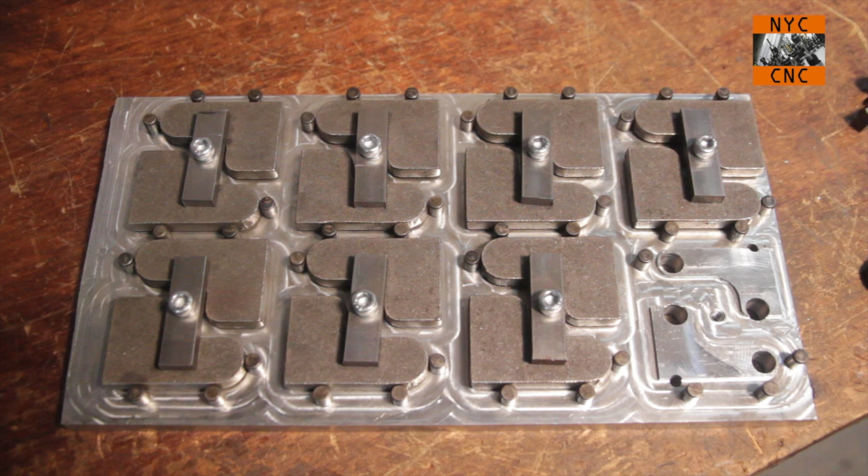So again, I'm no expert on this, but I've made a number of these now, and I've figured out some things I like and things I don't like. Some may be obvious, some may not, so let's dig in. The primary operations done are drilling, which makes the fixture a little bit easier to design because you don't have a lot of lateral forces.

So the first thing is, anytime you can, have one clamp multiple parts. In this instance, it's a very simple strap clamp I made myself out of a piece of cold rolled, and I punched a hole in it with my Whitney punch press. Very easy to make and very easy to replace if you need to. As I mentioned, something I used to do was really over-engineer these.

And I used to machine a whole plate with reliefs in it instead of using dowel pins. Folks, use dowel pins. Super easy to do, saves a lot of material, a lot of machining time, and you can reconfigure the same plate if you need to. And if you're done with the fixture, if you want to save your dowel pins, knock them out and reuse them.

This particular part comes off of plasma, so you've got to think about what that means. My plasma, like most, will cut with a small amount of angle on the edge of your part, as well as usually has a bit of dross on it, which is metal around the edges, usually on the bottom side of the part itself. I tumble my plasma cut parts, which actually knocks a lot of that dross off. But as you can see here, there is a relief machined in, and what that does is basically supports the part on the interior so that I'm not affected by a sharp edge or an edge that has dross on it. Use 3 points of contact if you can.

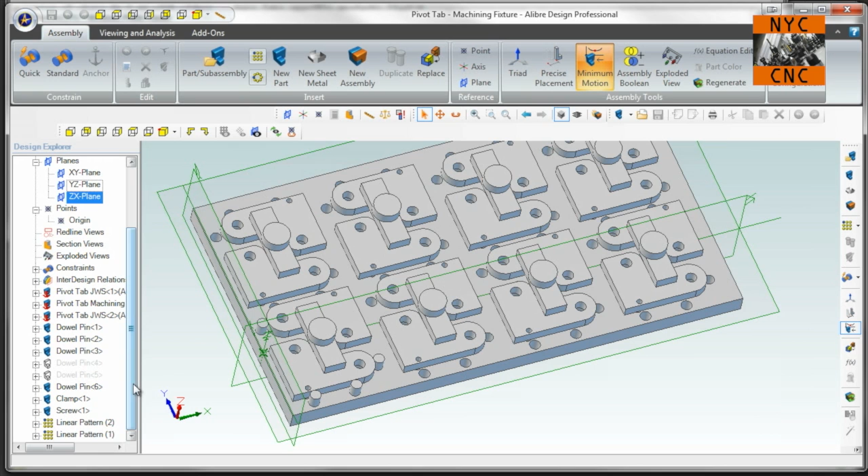Here is the fixture model in Alibre. As you can see, it looks just like the part we were looking at. I'm not going to go into the whole design of this. There are some tips and tricks on the setup and the patterns and the assembly constraints.

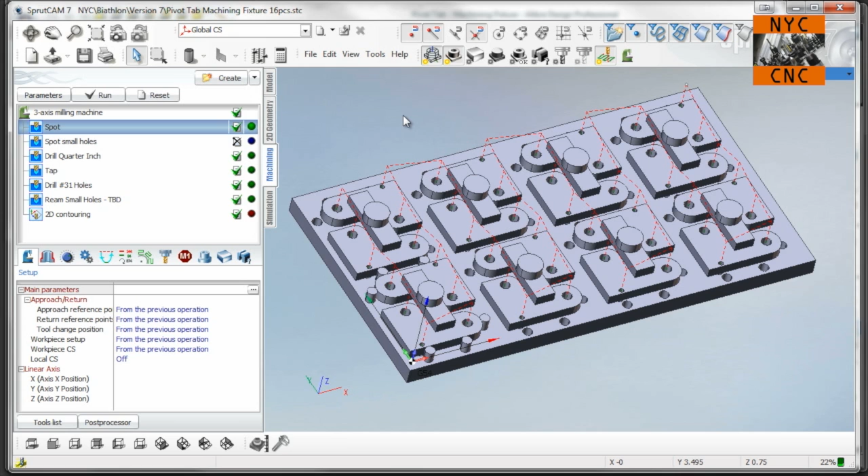So here we are in SprutCAM. I've run this fixture for about a year now, and I probably run it every 2-3 months. So even with that, I find that I'm still tweaking it, and part of that has to do with tweaking the part itself too. So maybe that's not fair.

But one of the questions I've got here is, do I go through and do a different spotting hole depth for the 1/4 inch versus the number 31 drill spots? Let's walk through these here. So yeah, spotting, drill 1/4 inches, tap just the end holes, pre-drill with a number 31, ream, and the last step is the 2D contouring, which is trimming up the length.

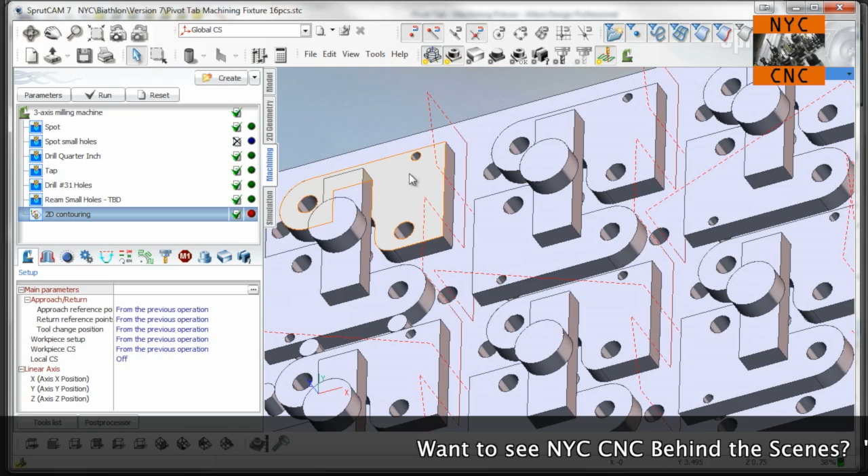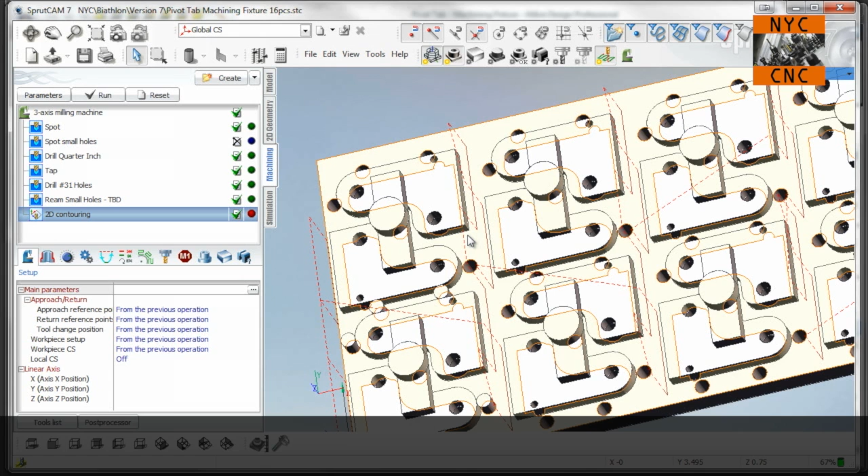So the way I make this, plasma isn't always the most precise method, and more importantly, this part gets welded and I want it to be at a right angle. There's a separate fixture that does that, but I want this face to be square, and I want it to be accurate distance relative to the 3 holes. So the easiest way to do that is to cut it 20 or 30 thou longer, and while I've got it in this fixture, just run a 1/4 inch end mill along it, and in one operation trim it up. It makes life easier.

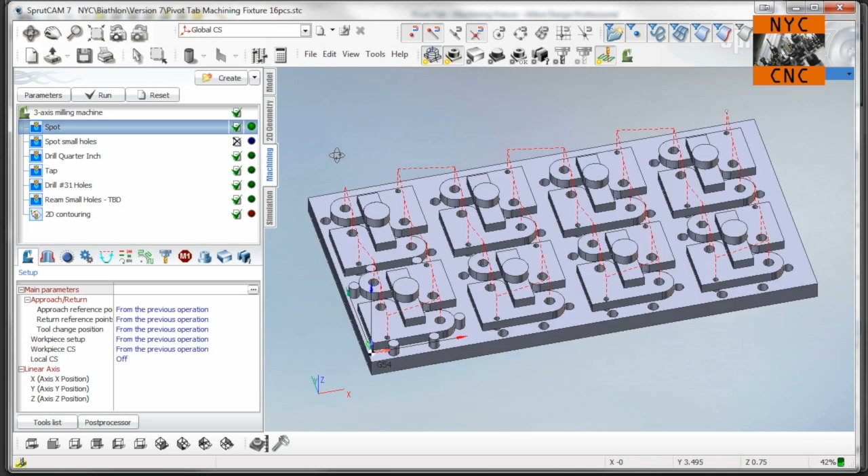So that's about it. I guess I'll run a quick simulation. Oh, the other thing, this is a more simple fixture, so I think I just imported this all as the part, but for sure on other fixtures I will import the pieces that are the actual fixture bottom and the clamps as fixtures in the library, which will help with collision detection, which can be really important if you're experimenting with different fixtures and different clamps and so forth. It's the worst feeling in the world to run an end mill through one.

The only thing that's annoying, I find, is a lot of times when I first make a fixture, I'll run the process with no parts in it. And sometimes, for instance, on this 2D cut along this edge here, I'll cut it deeper than the part itself, and it actually cuts a little bit into the aluminum fixture. That only happens once, but if you've got this base piece set as a fixture, it won't let you do that because it's trying to do collision detection with the fixture itself.

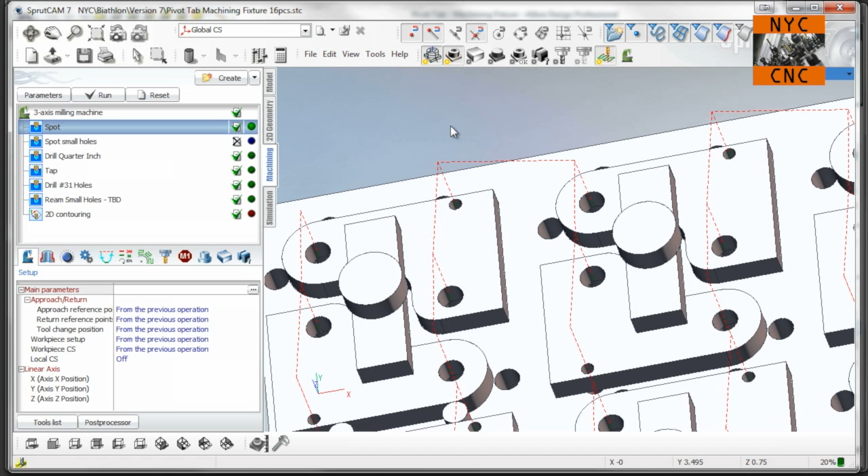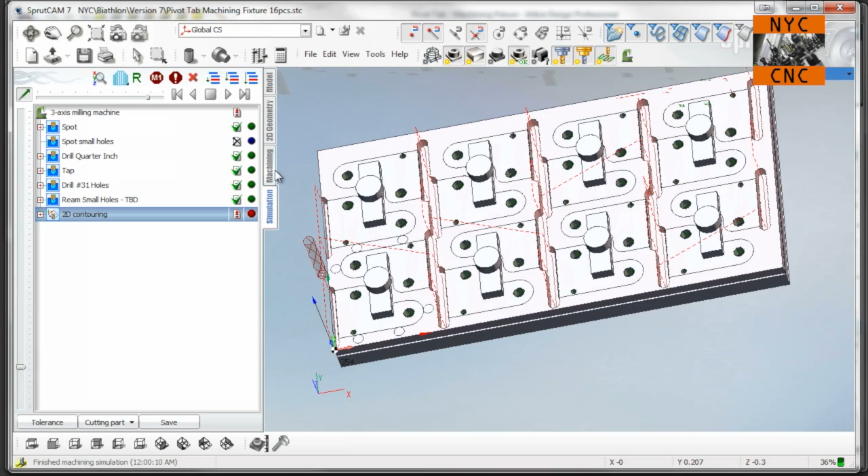But that's about it. Click run here and do a quick simulation. It's all the spots, all the 1/4 inch drills, the little drills, tapping, and the 2D contouring. So that's about it for the SprutCAM side. Let's go see her in action.

Okay, let's clean off our vise here. And make sure we use the right corner. Feels good.

Okay. Oh, you know, I just remembered, I forgot to mention in the design, an obvious point, but drill those through holes, which I'll show you. You want to get the fixture cleaned up as quickly as you can when you go to put the next set of parts on. So through holes let the chips fall through your drill holes a little easier.

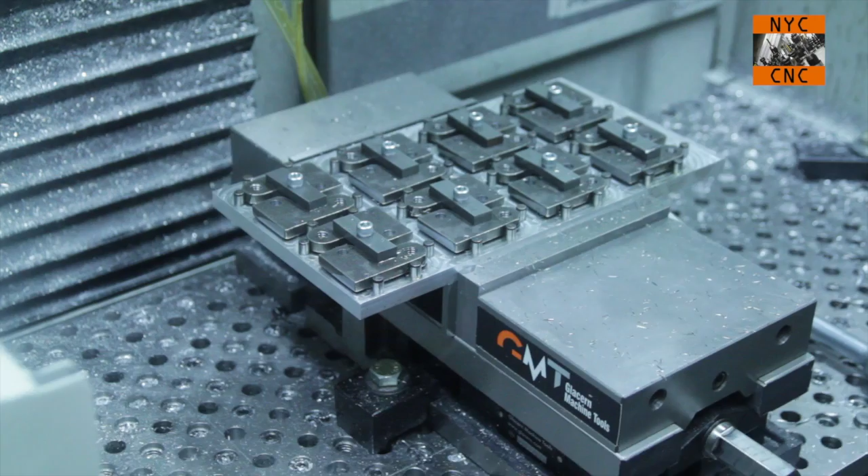Okay, there she is. Couple more things that I remembered while it was running. The center line of pins here are shared pins between the two inside row parts. It's always a nice way to save real estate and fixturing costs. And because these are plasma cut, I make sure to have my plasma cut starting and exit points nowhere near the dowel pins. That way they don't mess up. Plasma tends to have a little bit of a messy entrance point.

So again, that's one of the virtues of using pins over a machined sidewall of some kind, is you can account for variations in the material like that. So anyways, that's a wrap for today, folks.